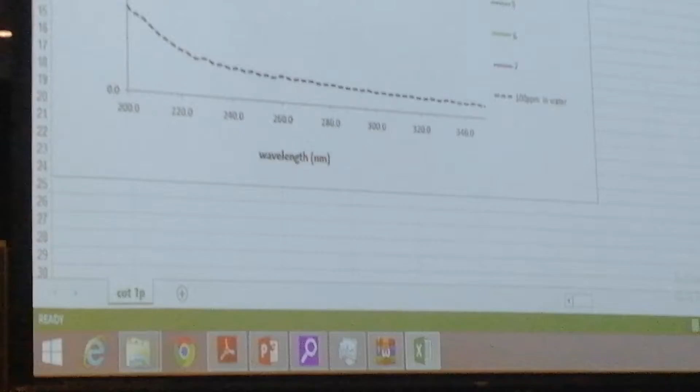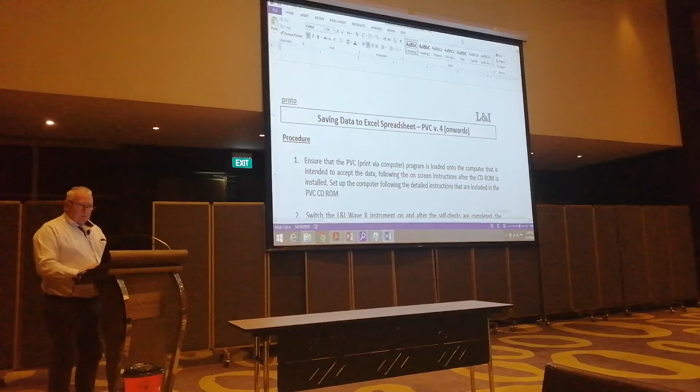These curves are on the training stick that the Hansa vessel have received. We should take a quick look, just to repeat for you who have done this, and then for you others that is going to take a look at this.

It's an easy procedure. This is on your form. Follow this setup.

And here is where you are changing. Normally it comes out in what they call PVC, and then you change that to Excel. As soon as you change it to Excel, you can go in and run it on this other Excel form that we used.

The new generation of this instrument is that when you are clicking on this cargo that is agreed, the Excel form, the curve will come and lay down on the screen of the instrument. So it will be there all the time when you are cleaning.

So you just see that you have to be coming down, coming under, and there you are. It's easy, it's going to be better. But until so, we will have to do this.

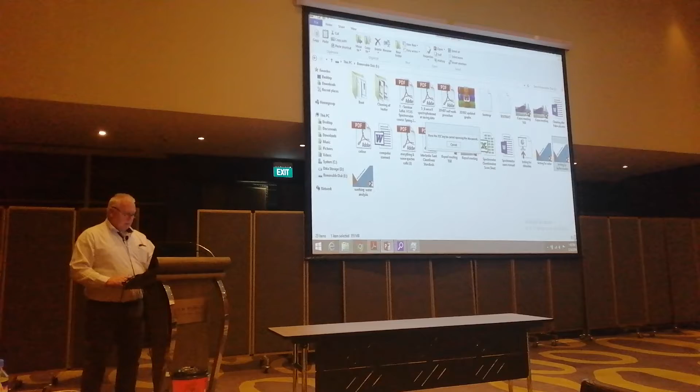This is what they basically are doing now in the practical session, and what you did just now. So this is just for your quick repeat, and for those who is next in, this can be good to have as a pre-warning.

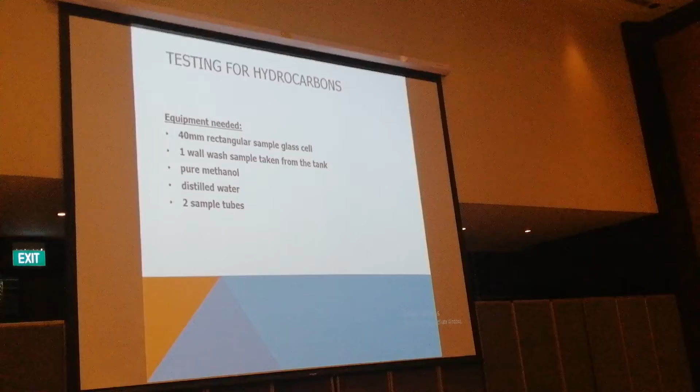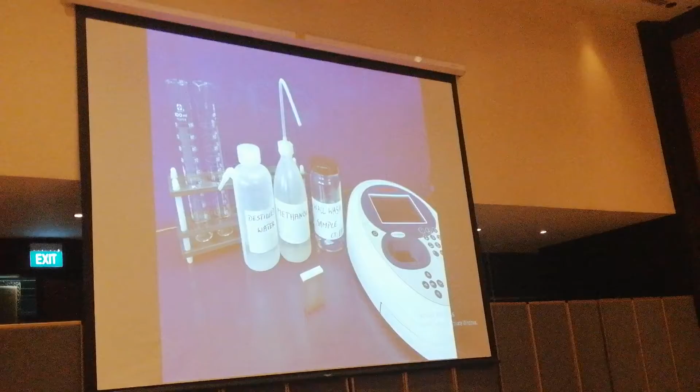The reason why they are standing a little bit long is because they are working on to put some sound on.

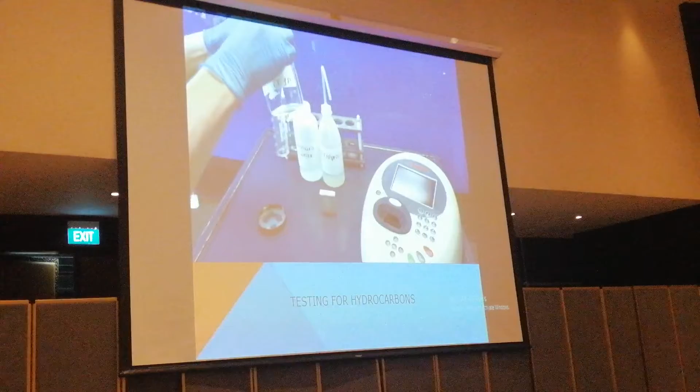You see, we need to compare. We have decided that this 25 is the one that you will use, but actually 10 to 90 is also basically okay. But since... you see, this is a 10 to 90, but that's okay.

This is the standard that he made, for those who is not used to wall washes, and then he mixed it up with DI water. As I said, we will use 25-75 and not 10-90. But otherwise the procedure is exactly like that.

No. What was that? That is not correct. I have not run this for a long time, but it is, of course, not the quartz cell.

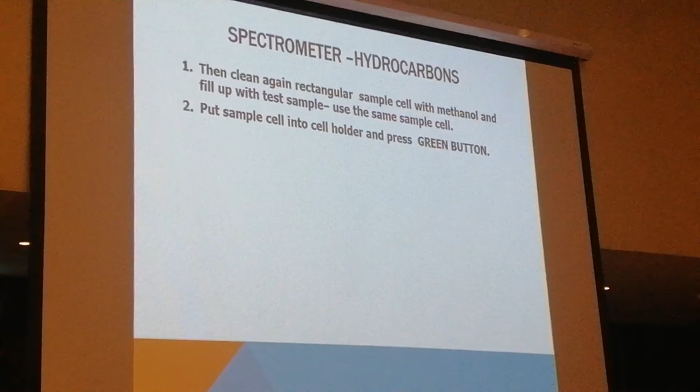You see, they are using the cap. It is not that important to use the cap. You press the blue button when you are setting the reference.

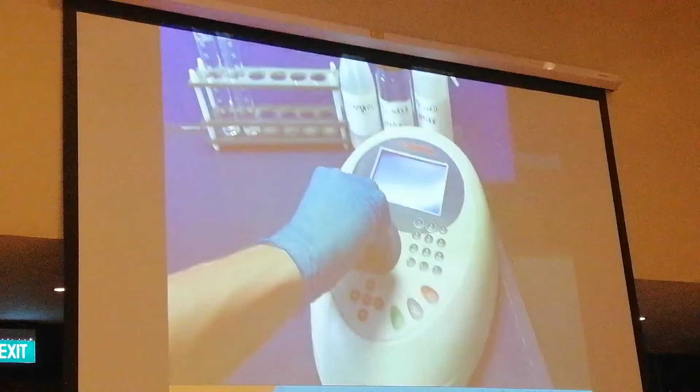There is one thing that is not mentioned here, that it is very important that you mark the samples that you are doing. Mark it always. You have on board the small labels that you put on so you don't risk confusion.

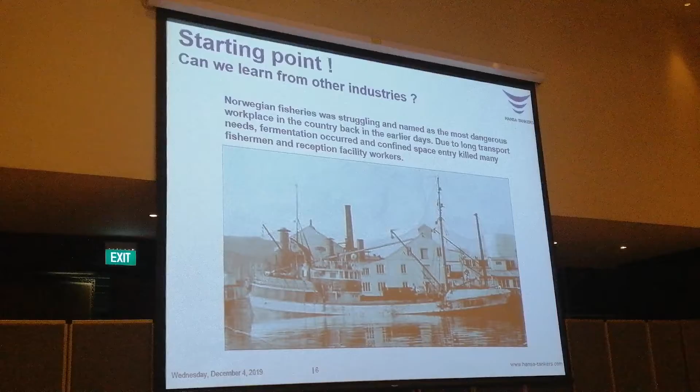We were fishing herring, mackerel, and other things. And aside of the perils of the seas, one of the most dangerous things that we were working with was when we have to go down in the hull or in the tank to take up the smallest rests of the catch.

This was used for making fish oil, so it was usually pumped on board, pumped ashore. Or they use these grabs to take it off.

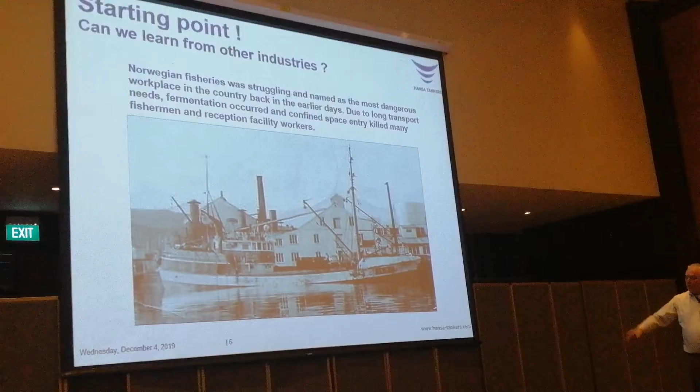But thinking of that, we, as responsible, that we shall accept that people should die for us - that is not acceptable. For Hansa, we have a desire that all the crew members shall be in a better condition than they came when they are going home.

So therefore, we are not accepting that confined space entries shall continue to take lives. So what can we learn from other industries? For me, it was easy to find the fisheries, because I've lost too many friends.

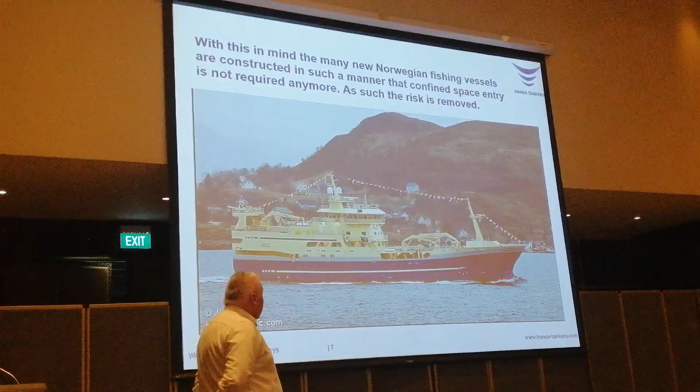The new ships are designed in such a way that they do not need to enter the cargo tanks when they have finished the discharging. The shape of the tanks is made such that everything is accessible from the deck.

So when we make our in-house risk assessment, then the best answer is to remove the risk. Just then you should be satisfied with the assessment.

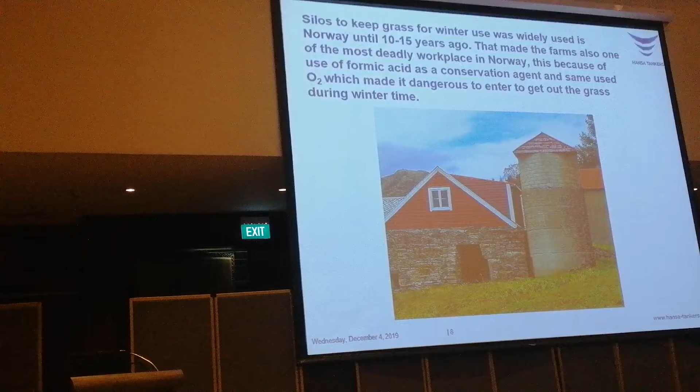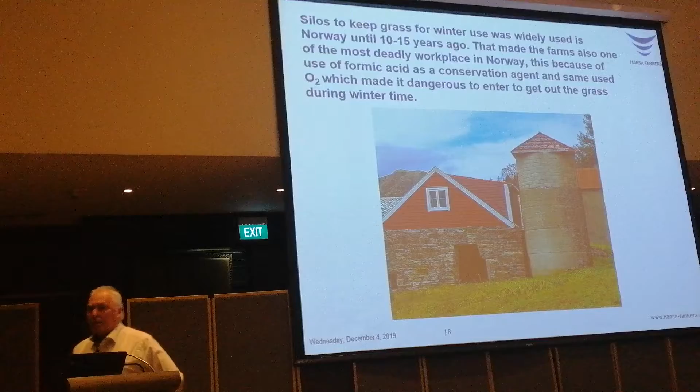Other things that was dangerous is that too many of the farmers lost their lives in the silos. The silos was where the farmers kept the grass for the winter time. And in order to avoid it rotting, they have to use what we call formic acid. But the problem is that this process, like the same as on the fisheries, is that it is using oxygen.

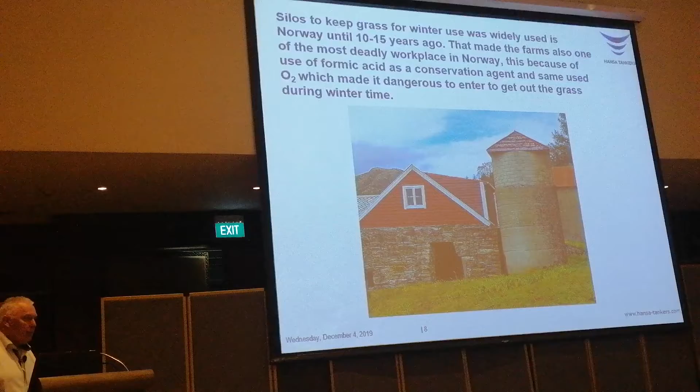So we have several tragical examples where whole farmer families have been found dead inside the silo. Because after a certain time you come down to the lower levels and you have to go down and dig out the grass. And if the father goes in and he falls down, then his son jumps in, and we know the story.

So this was also something that was very much of a concern for the government. So what they did was - maybe not good for Greta Thunberg, I'm not sure - but they used plastic.

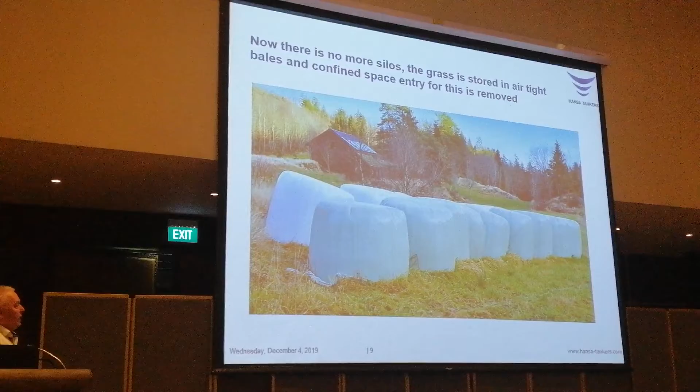And they make these bales. This is airtight, so there is no oxygen coming in, so it serves the same purpose. Again, no silo - they have removed the risk.

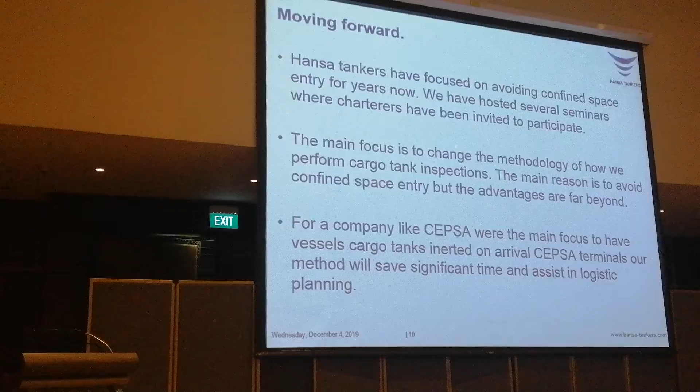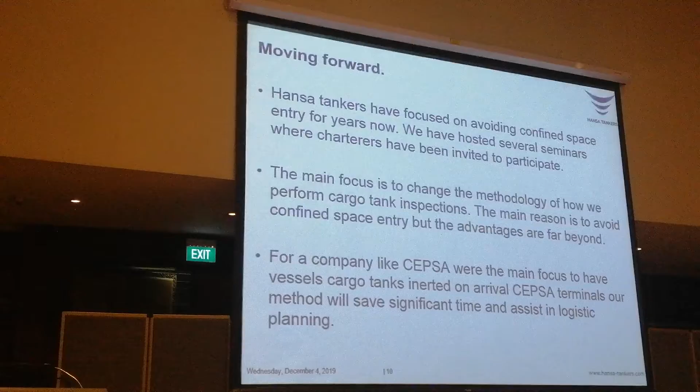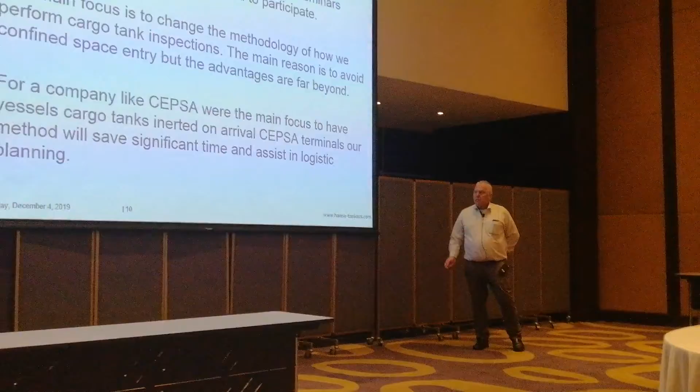We went to several companies, Cepsa and Repsol, and we have tremendous problems with some of their terminals because, especially when we are discharging the veg oils, they are not allowing us to open up the tanks. That means there is a very high risk for collapse of the cargo tanks because the lines and

the vapor lines get clogged by high melting cargoes. In the same way, we say that, okay, we can come with the tanks ready inerted. You don't need to have any surveyors come on board.

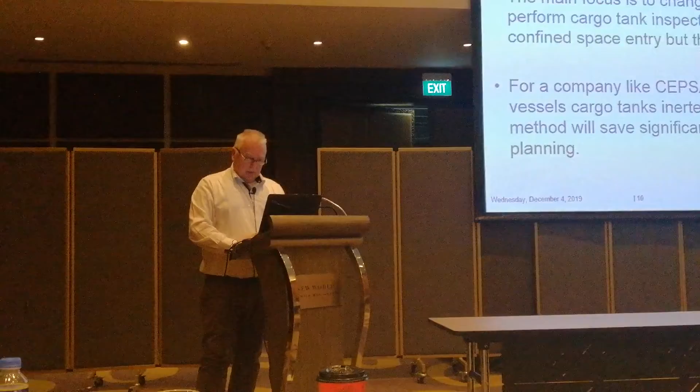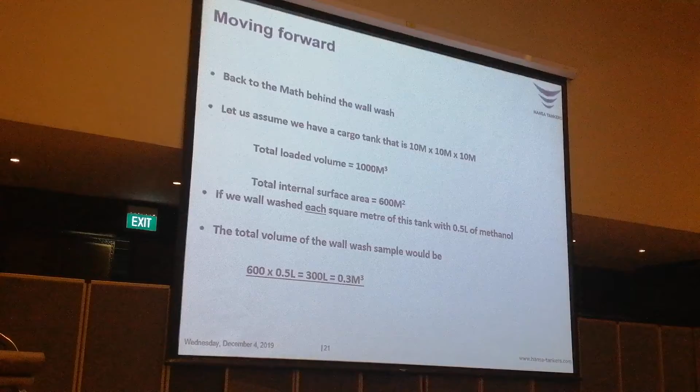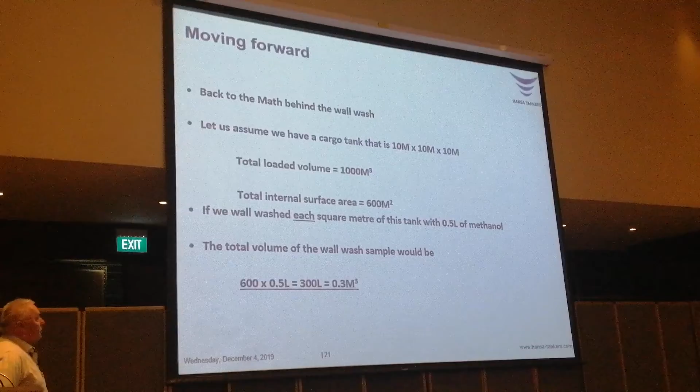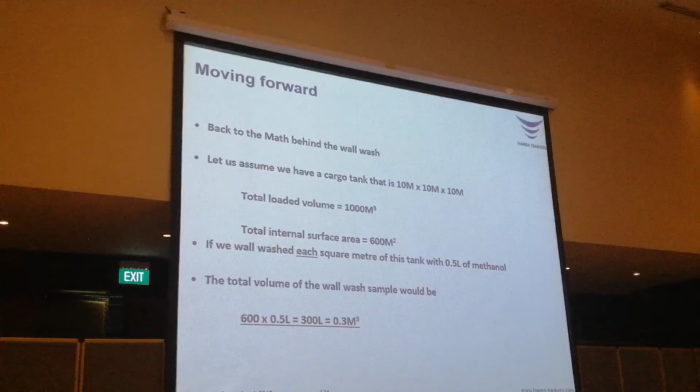That is the same as I said, that the wall wash does not represent the cargo tank. In order to demonstrate it, this is a normal cargo tank, 1,000 cubic meter cargo tank. And if we should make an ideal wall wash, that means we should wall wash the whole tank, everything, collect everything, and then we should have a wall wash sample of 0.3 cubic meters.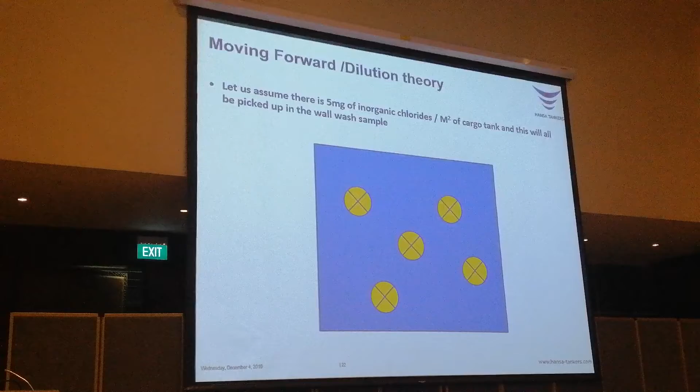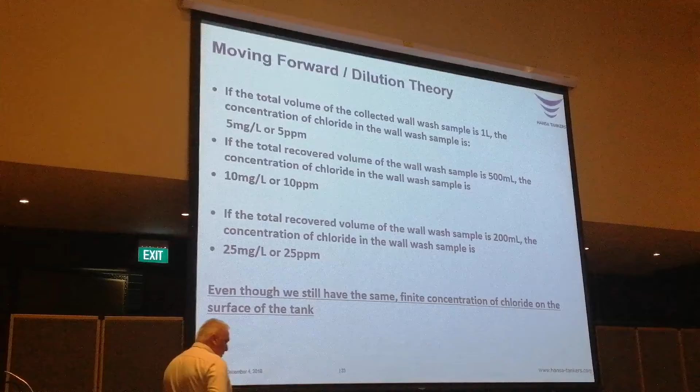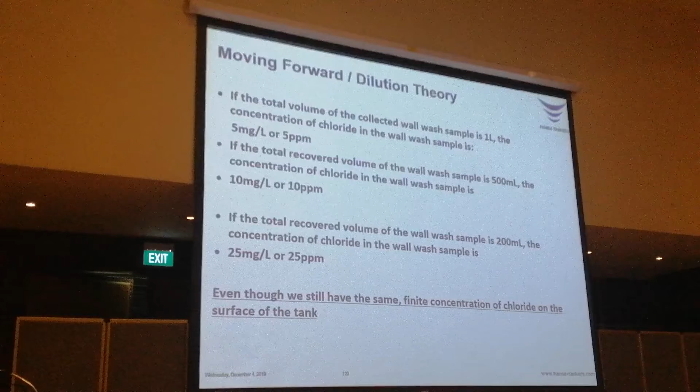So, if we assume that there is 5 milligrams per square meter of inorganic chlorides in the cargo tank, this will all be picked up in the wall wash sample, and then we will have the following calculation. The reason we took this up is that the surveyors, when you asked them, they never calculated how much methanol they used, and they did not calculate how much they collected. But still they could say that it contains that much ppm.

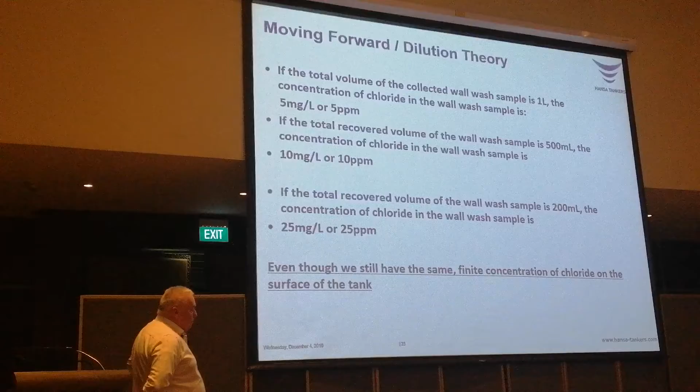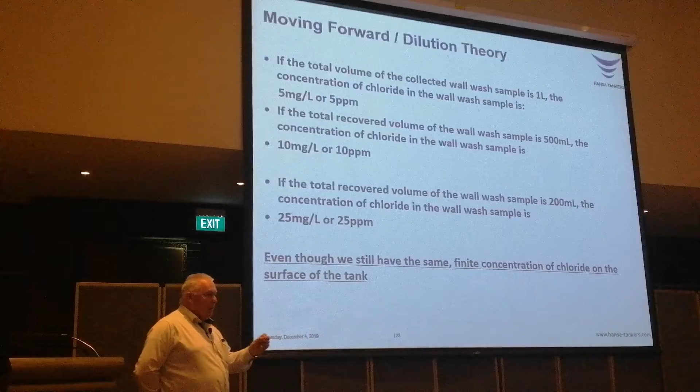So if I say that we use 1 liter, and milligram per liter is the same as ppm, that will give you 5 ppm. Or if they use half a liter, it will be 10 ppm. This is math, even your grandmother can do this. Or if it's 200 milliliters, it will be 25 ppm. But we have exactly the same contamination in the tank. We have exactly the same contamination. But the report the surveyor sends to the charterers is 5, or 10, or 25 ppm. If the limit is 5, the 5 will pass, the other two will fail. But the contamination in the cargo tank is exactly the same.

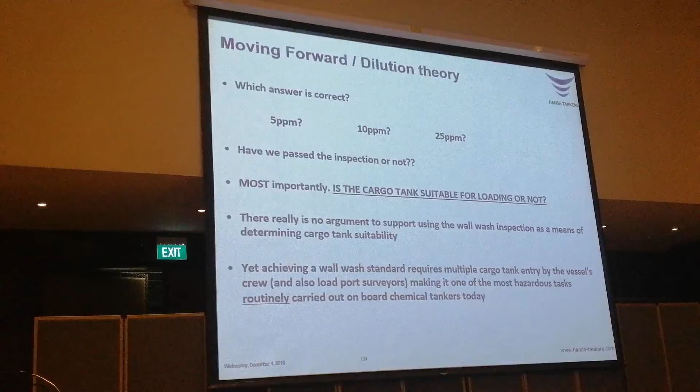Then you see how stupid it is. It doesn't give you anything.

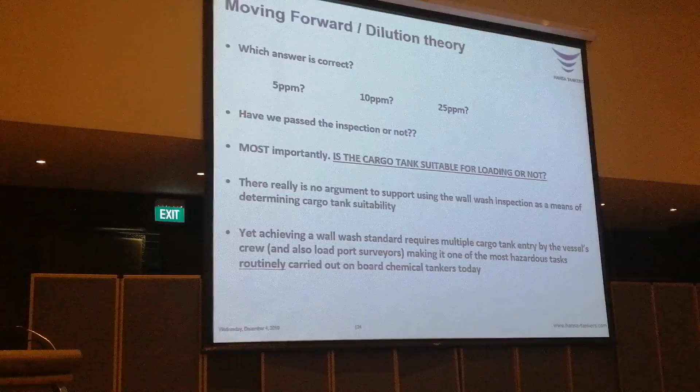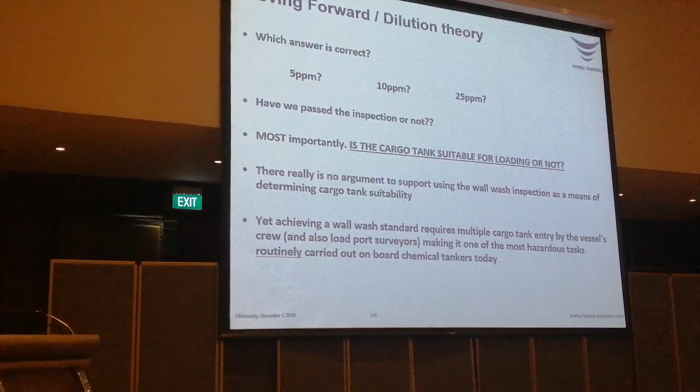I have had a vessel laying at anchorage in Yanbu for 3 days, waiting for a surveyor to come on board. And when the surveyor came on board, he told the captain that for $2,500 I can accept your tanks here and now. That happens also, we know it. But the captain had sent his results, and he said no.

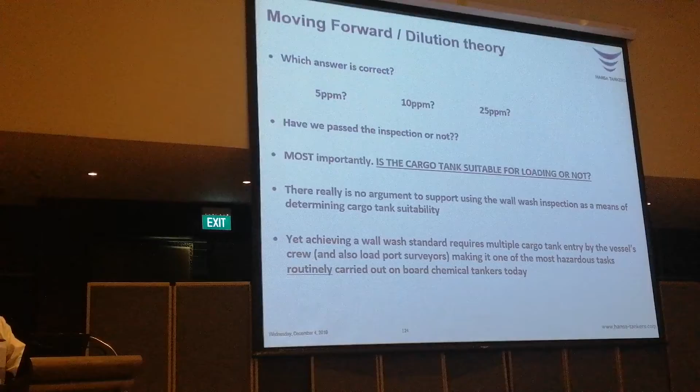That was the one I was talking about. 93 fatalities, and that was only for 15% of the port state.

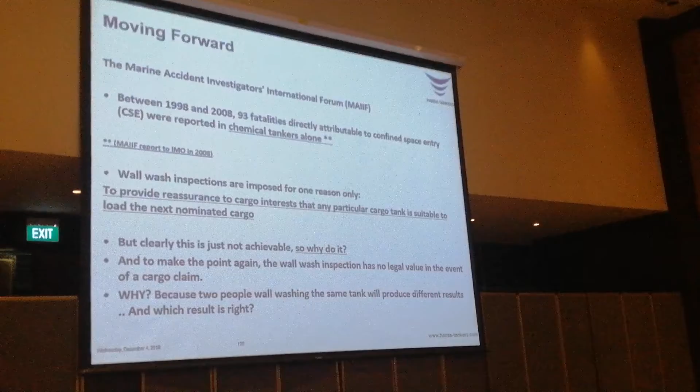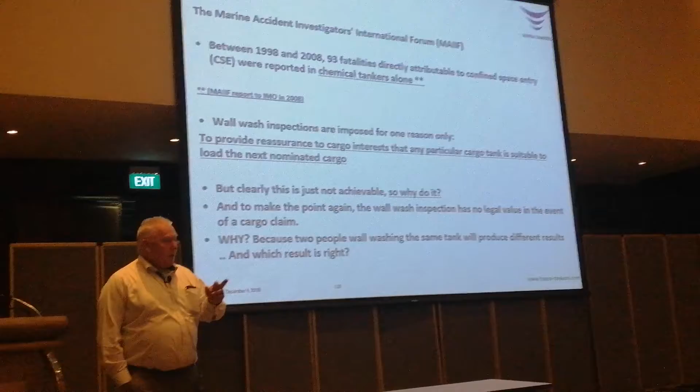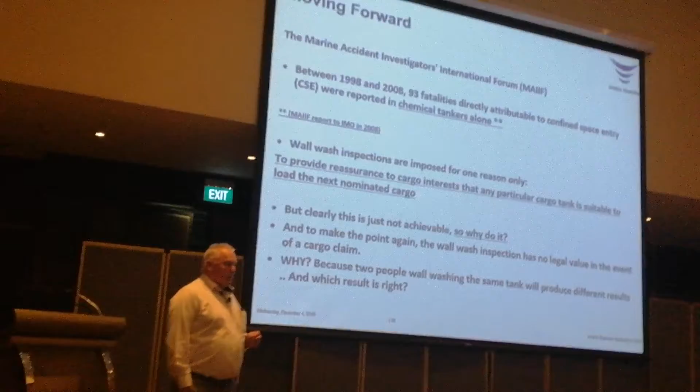So to make the point again, the wall wash inspection has no legal value. In the event of a cargo claim, the surveyors, when they sign the certificate of cleanliness, it is valid up to the time of signing. 5 minutes after, it's not valid anymore.

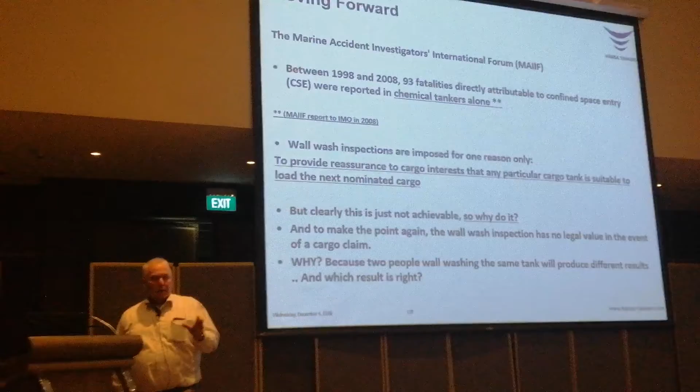So again, why should they have the right to say this, when you see that they can't get exactly the same result, as long as they don't calculate how much methanol they are using, how much they are collecting, how much is representative, they come up with absolutely zero.

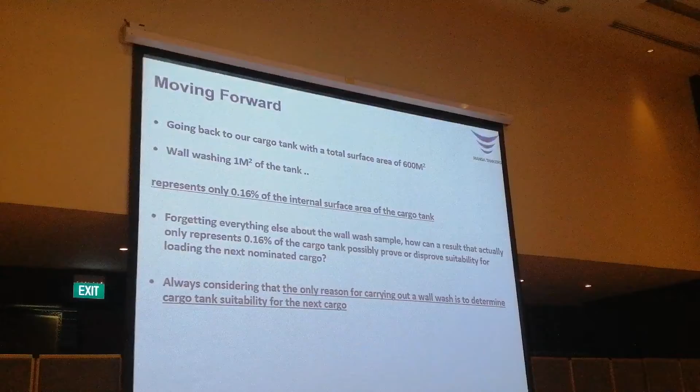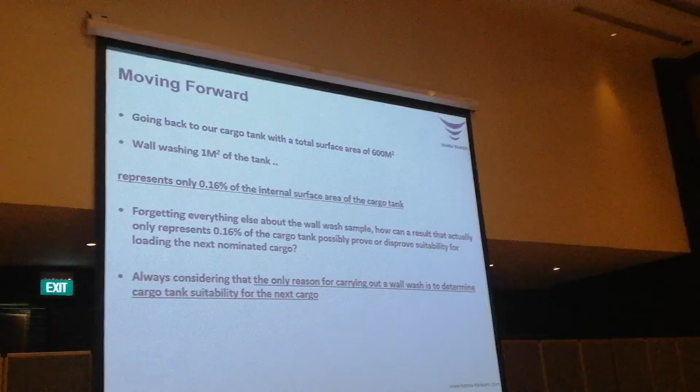You can read. I'm just trying to get the focus on the washing water analysis. Again, the washing water analysis is telling you how much you're taking out of the cargo tank from the previous cargo.

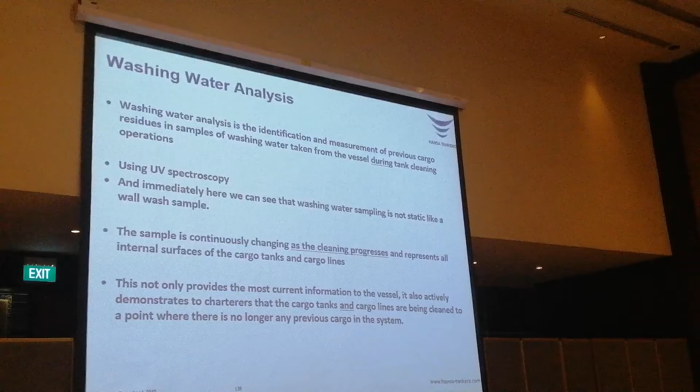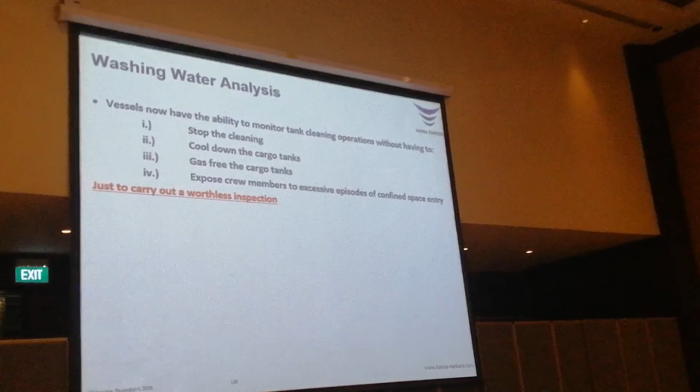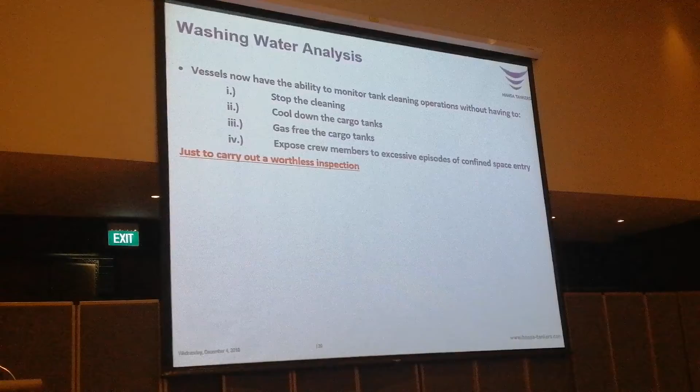What we have when using the washing water analysis is that we can stop the cleaning when it's not working anymore. We don't need to do the cool down of the cargo tanks, the gas freeing of the cargo tanks, exposing the crew members again and again to going into the cargo tanks.

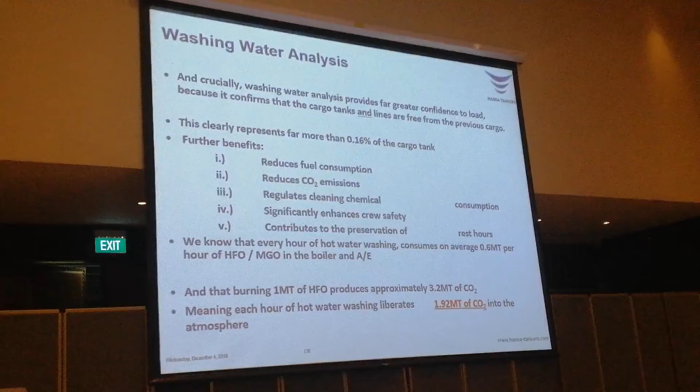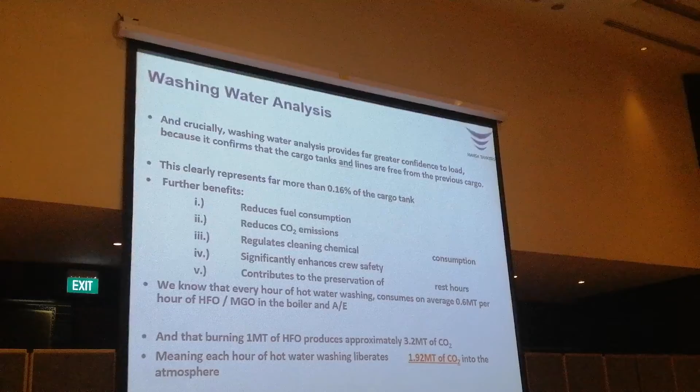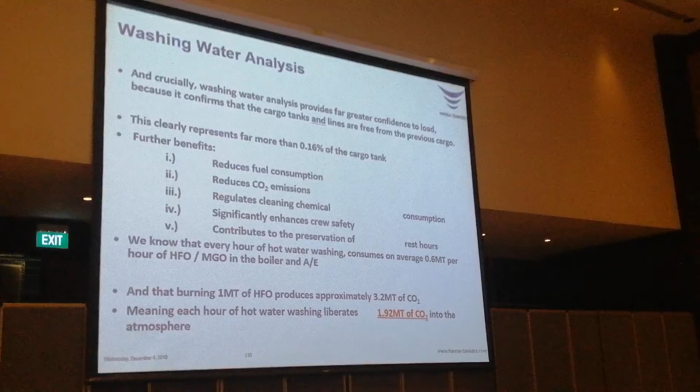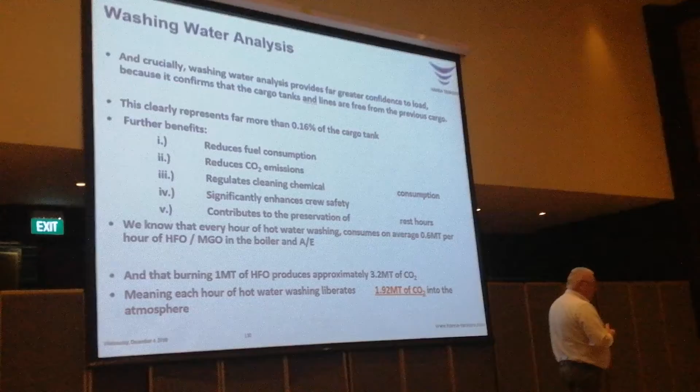Other things that come up also is the savings, which is now becoming quite high up in the media, especially about reducing CO2 emissions. But for every hour of hot water washing, we consume about 0.6 metric tons. And I think if you can save 1 metric ton, you have saved more than Greta Thunberg saved on her trip across the Atlantic, which is now on every newspaper page, how green she is. So if you can save 1 hour, you have done the same. So that must be something.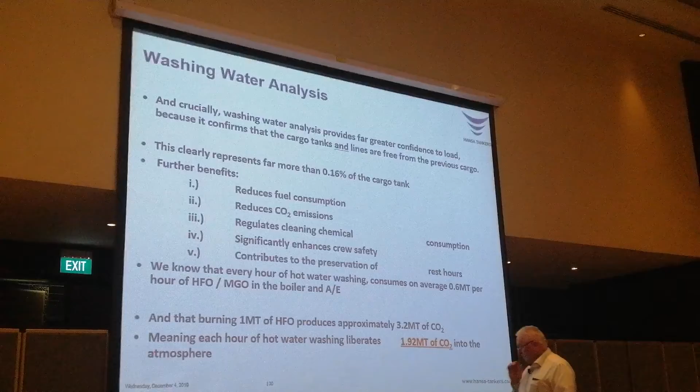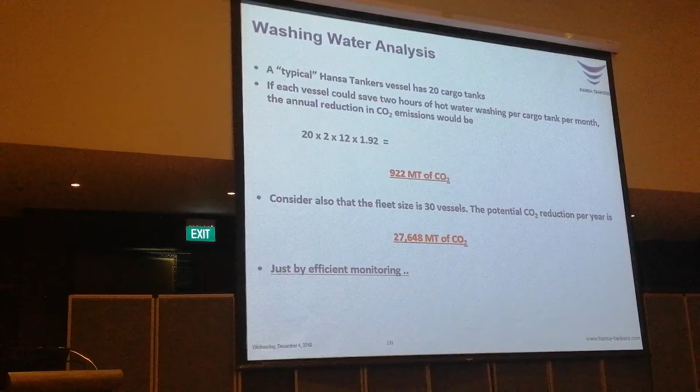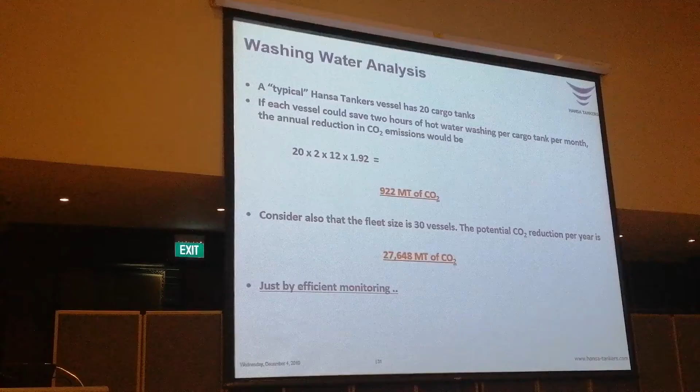Some more math. Now we have 43 ships, so it's even more. So besides the safety aspect, the saving for the owners, this is the saving for the environment.

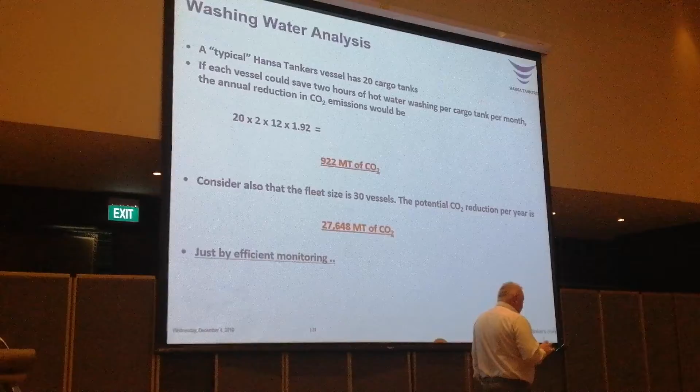And we made the math back in 2016 when I started here at Hansa. We actually monitored, I went back in the files for years and took out what the vessel was doing. I knew it from before, basically, but just to have it confirmed - how long time have they cleaned, how have they cleaned.

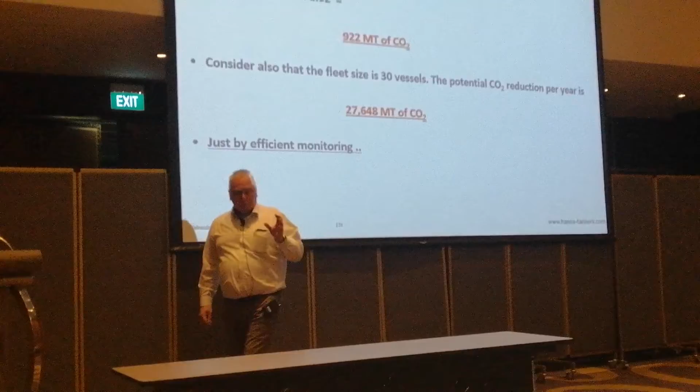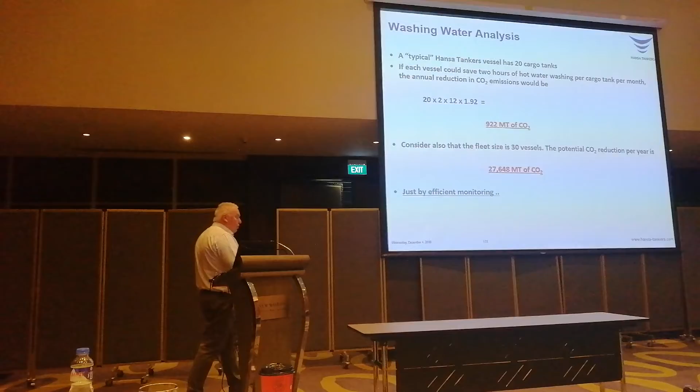And then we made a template. And then we started using the spectrometers, and we noticed the savings in emissions, in bunkers, in chemicals, and in time. I was allowed to put a number on the time, because the actual time saving should be calculated with the daily hire of the vessel. Even though the vessel was in ballast, that doesn't matter. Even though you didn't actually physically save it, we say that we put a value on these hours that were saved, because you could do something else, paint or whatever.

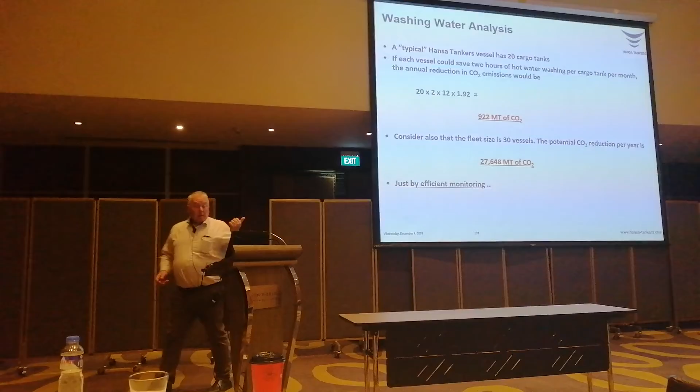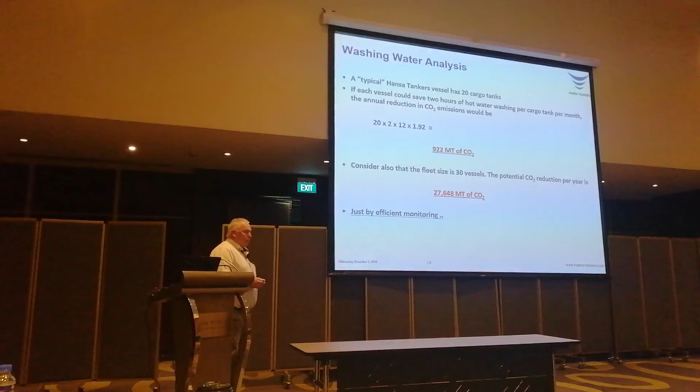Sometimes the vessel is out for cleaning, and then these hours are accountable directly. But nevertheless, at that time, with 30 ships, we saved - and it's not 100%, but I have said I was able to capture approximately 60 to 75% - the saving for these 30 ships was $3.75 million. And it was confirmed again the year after that the savings actually had been more than $7 million for these 2 years. And this is money that goes directly back to the owners.